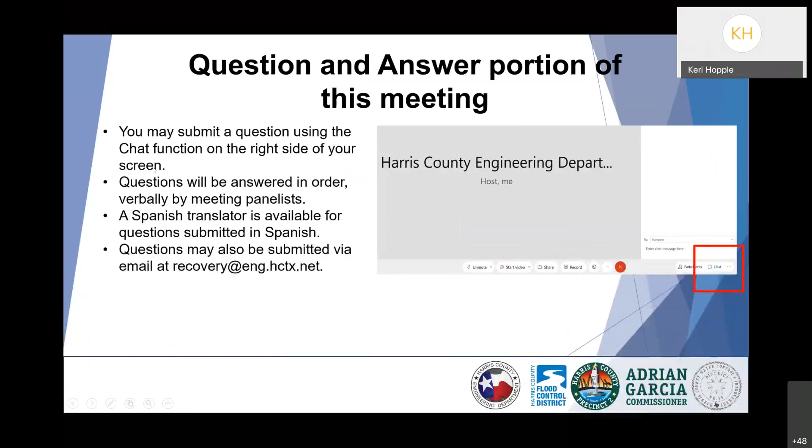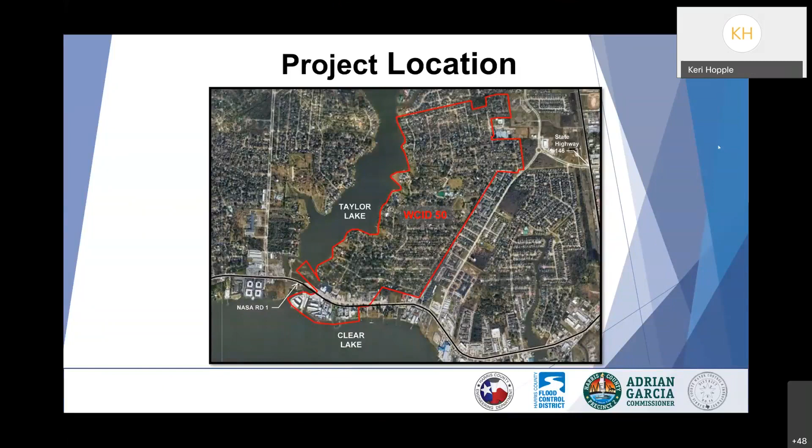The purpose of the project is to assess the historical flooding, to reduce the flood risk within the WCID 50 service area, and to reduce the number of flooded homes and alleviate the ponding in the streets.

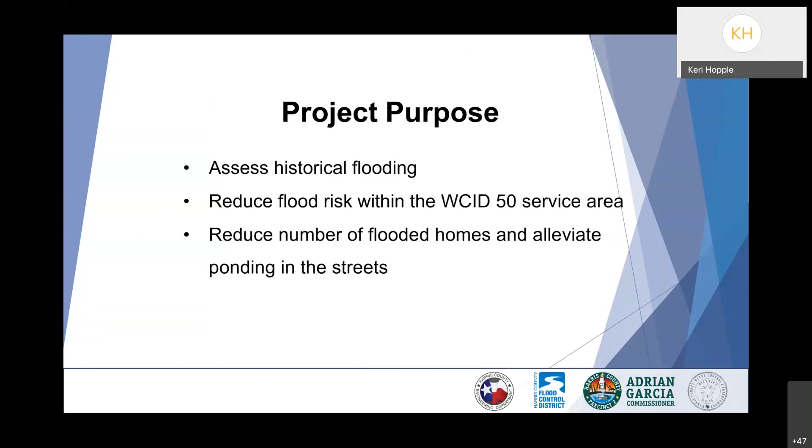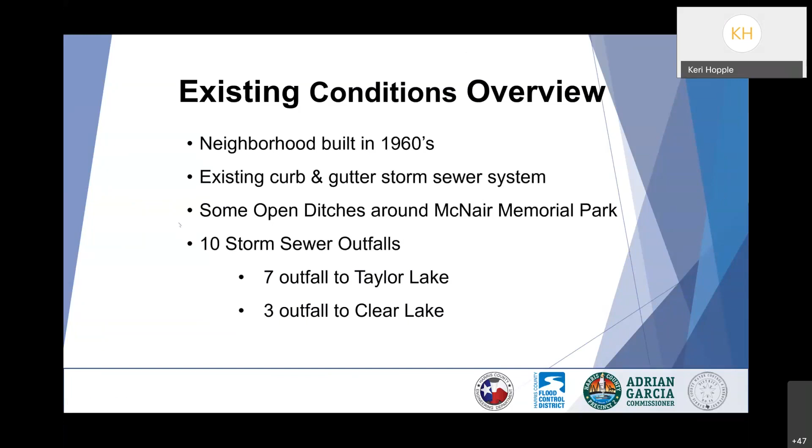During our study, we completed an existing conditions overview. As many of you know, the neighborhood was built and developed in the 1960s. It's an existing curb and gutter storm sewer system with some open ditches. There are a total of 10 storm sewer outfalls to the storm sewer system: 7 outfalling to Taylor Lake and 3 outfalling to Clear Lake.

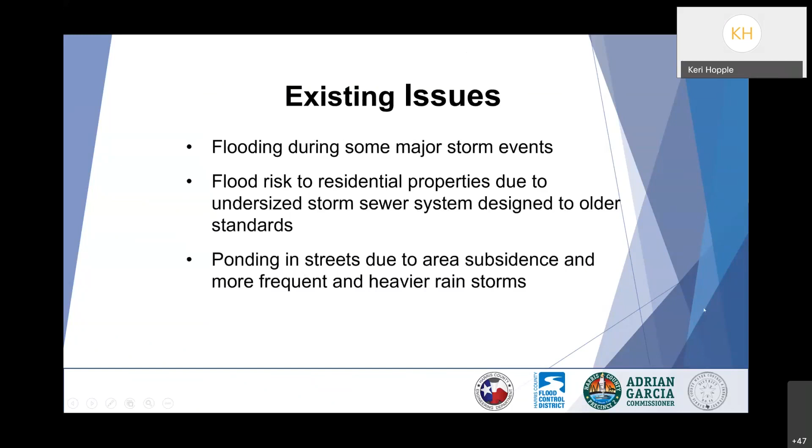The existing issues are flooding during some of the major storm events. There's flooding to the residential properties due to the undersized storm sewer system, which was designed to much older standards. And there's ponding in the streets due to the subsidence and the more frequent and heavier rainstorm events.

This is a general summary of the proposed storm sewer improvements that we are designing and will be constructing later this year. We'll be increasing the storm sewer diameter sizes along 9 streets, increasing the outfall sizes to Taylor Lake at 3 locations including Crestwood, Whitecap, and Tallowood, and reversing the flow of storm sewer at Woodland Drive from Shadow Creek to Tallowood. That will alleviate some of the burden on the southern part of the system, which is overutilized, and send it to the central part of the system, which is currently underutilized.

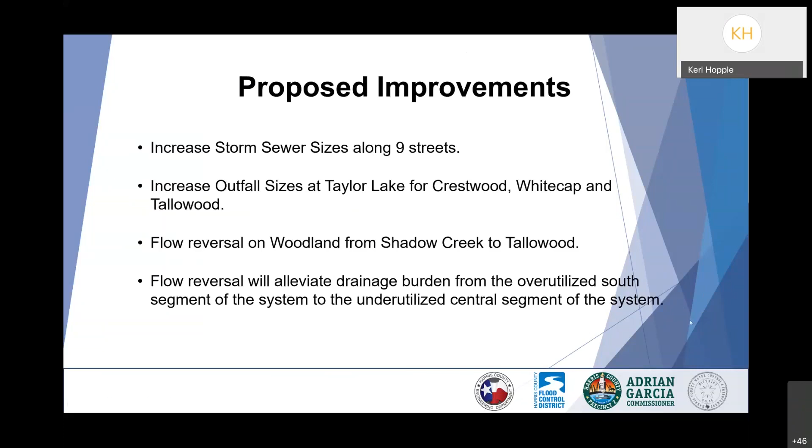Here's an overview of the proposed improvements at the northern end of the district boundaries. The main takeaway from this slide is the 3 outfall sizes that will be increased significantly to Taylor Lake at Crestwood, Whitecap, and Tallowood.

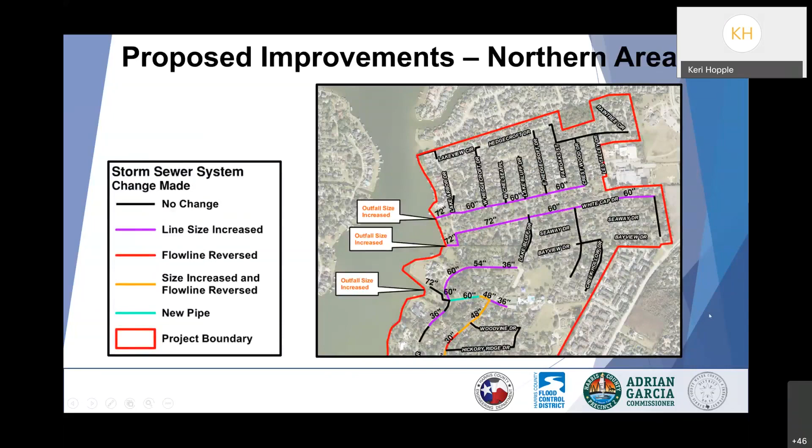Ramon, if you don't mind, I'd like to interject. I want to point out and thank Nawa Penthi and Max Gilliam, who came up with the idea depicted on this slide at the northern end, where you have the yellow and red showing the new pipe and the flow reversal. They did trial and error with the model to find out what would really help with drainage. Besides the increase in pipe sizes, this is key because everywhere from Shadow Creek south, everything depicted on this slide from north to south, was being carried to Taylor Lake to the two outfalls at the southeast corner of the district, so that portion of the system was burdened.

Doing that additional pipe connection shown in light green or turquoise, and doing the flow reversal in yellow in that area is key. We're seeing a lot of flooding in that southern area, and this carries the water not to the south, burdening that system, but to the north and then to the west into Taylor Lake. So it splits a lot of the flow and relieves the burden on the existing system, even more so now with the increased capacity of pipes. Thanks to NAWA and Max for doing that due diligence.

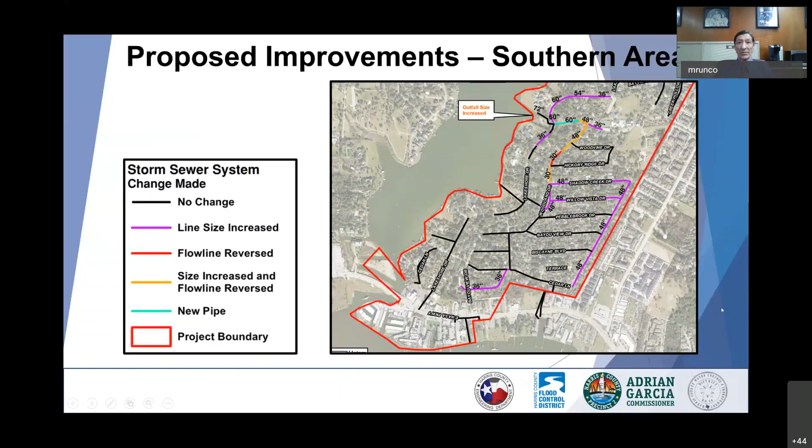Thank you, Mario. It's a good point. Now I'll turn over the presentation to our engineer of record, Keri Hopple, and she'll go over in more detail the nine street drainage improvements.

Thank you, Ramon. Good evening, everyone. As Ramon stated, my name is Keri Hopple with Midtown Engineers, and I will be the engineer of record on this project. The next few slides we're going to show you will show the proposed layout and sizes of the pipes that we are going to design for.

We will start talking here with Confederate Way. We are going to connect to the existing storm sewer system on the left side of your screen. We will then move the storm sewer behind the curb all the way along Confederate Way up to Cedar Lane, where we will turn and connect to an existing manhole.

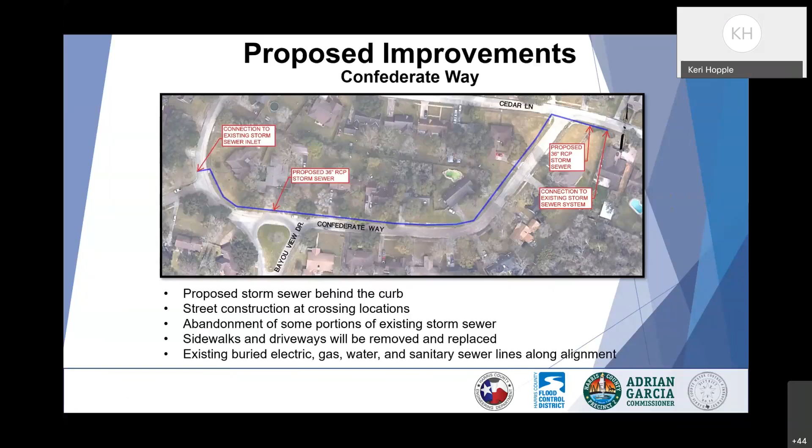Any sidewalks and driveways on this street and the additional streets I'm about to talk about that are located along the path of construction will be removed and replaced. Also, any utility conflicts that we come across will be adjusted accordingly, either before or during construction. Next slide, please.

We now are going to look at Cedar Lane. On Cedar Lane, we will begin on the top left side of your screen, where we will connect to the existing storm sewer system, and we will progress behind the curb up along Cedar Lane all the way to Shadow Creek Drive. There will be two connections: one to the Willow Vista storm sewer system that we're designing, and one to the Shadow Creek Drive system that we're designing. Next slide, please.

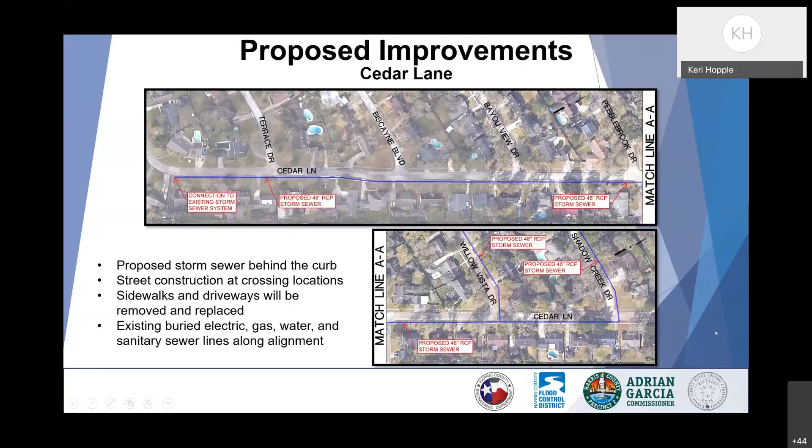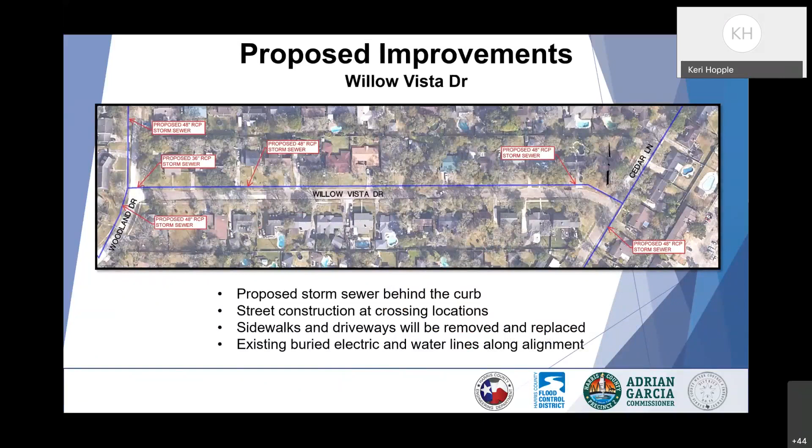On Willow Vista, we will start by connecting on the left-hand side of your screen to the Woodland Drive system. Then our storm sewer will move along the back side of the curb on the north side of Willow Vista, all the way to the right side of your screen, where we will connect to the Cedar Lane system. Next slide, please.

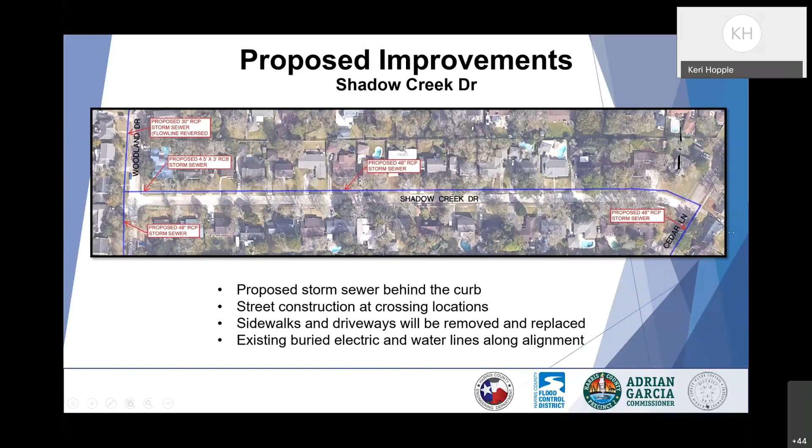Shadow Creek is very similar to Willow Vista. We connect to Woodland on the left side of the screen. We will construct behind the curb all along the north side, and then we will connect to the Cedar Lane system on the right side of your screen. Next slide, please.

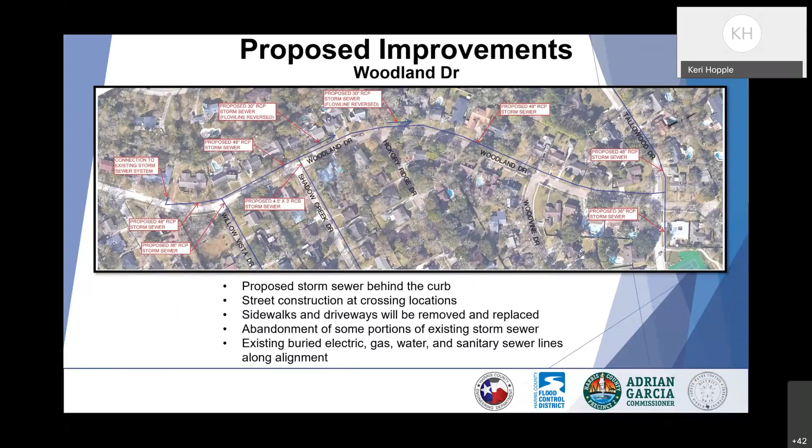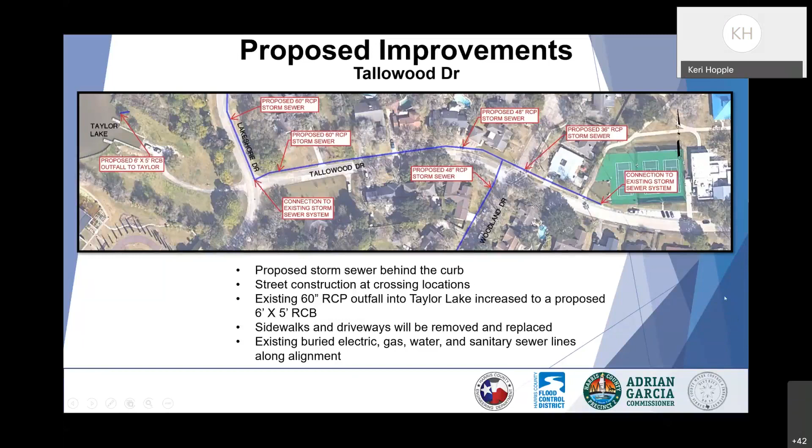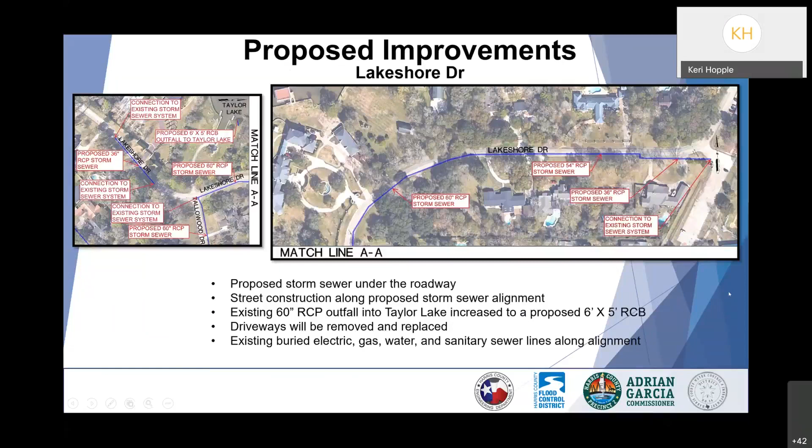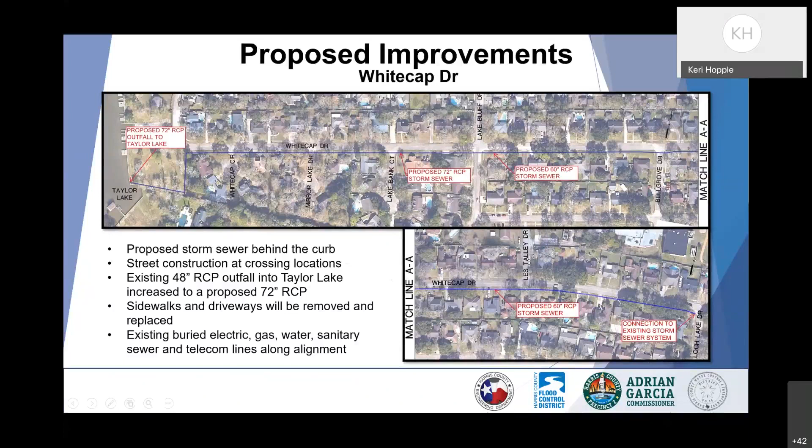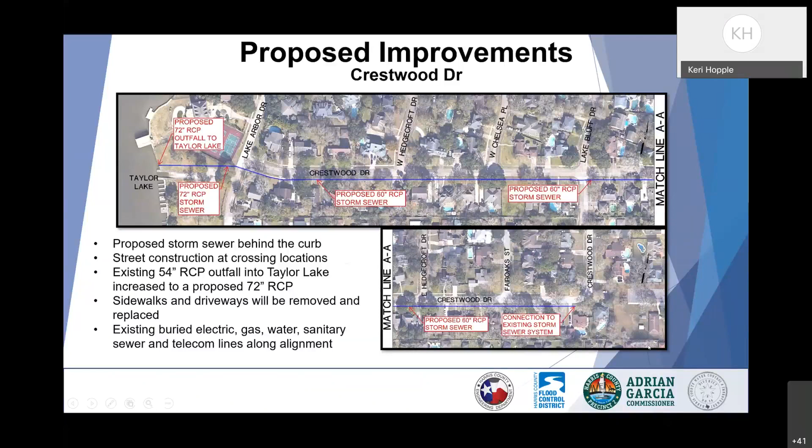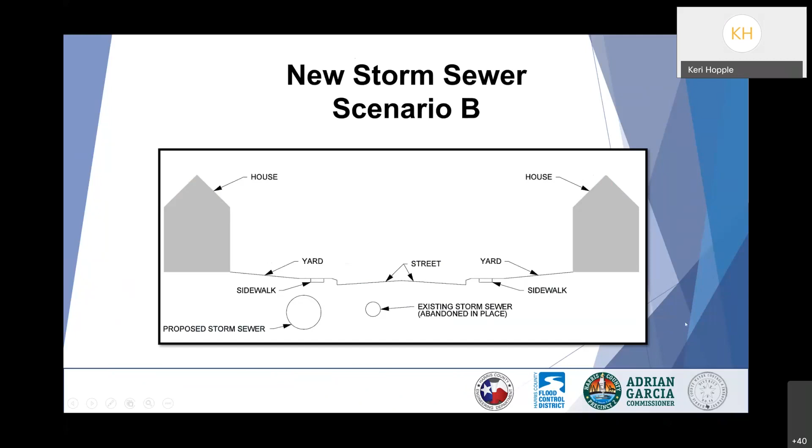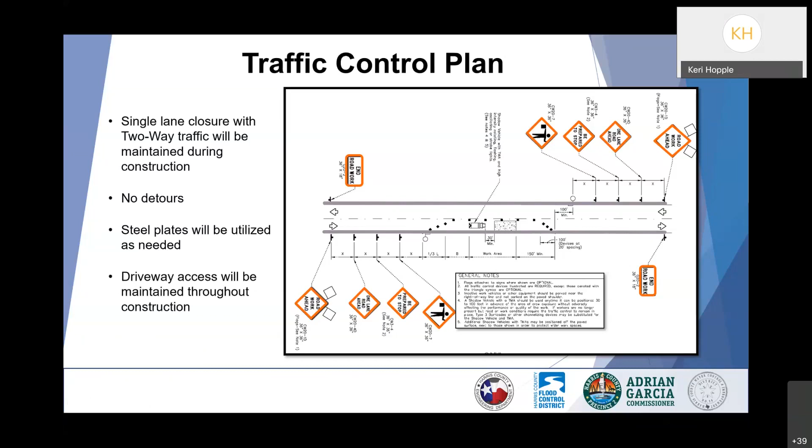We do anticipate using steel plates as necessary so that you will have access to your driveways maintained throughout the construction process.

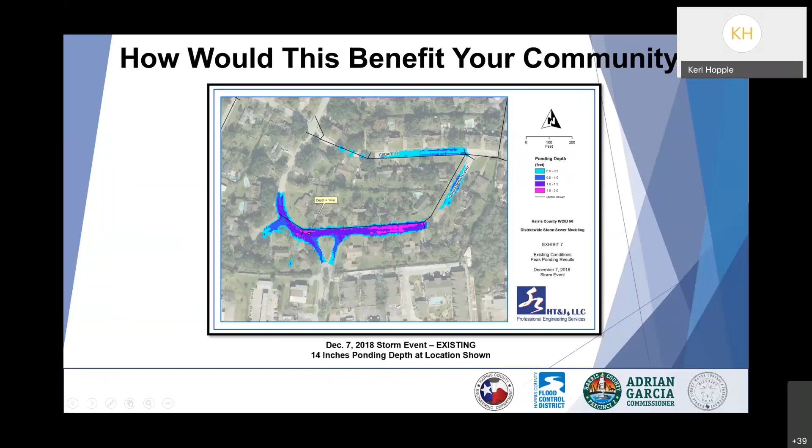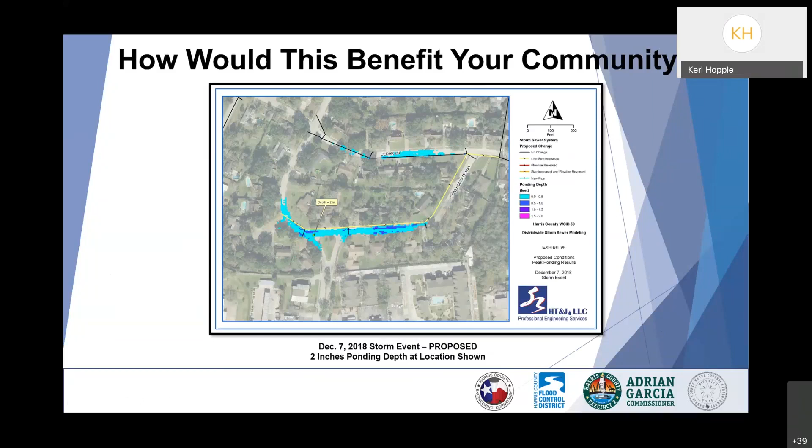With the proposed storm sewer improvements, that 14 inches will be reduced down to 2 inches. So a significant improvement for this one storm event, making it a lot safer for vehicles and pedestrians traveling, whether you're walking or driving.

This again shows a cross-section of the road there for this storm event on Confederate Way. Before, on the top, is the 14 inches of ponding going over the curb onto the sidewalks and even yards in some cases. And down at the bottom is the after scenario, which is a full foot, 12 inches, in reduction of ponding, keeping that water pretty minimally contained between the curbs.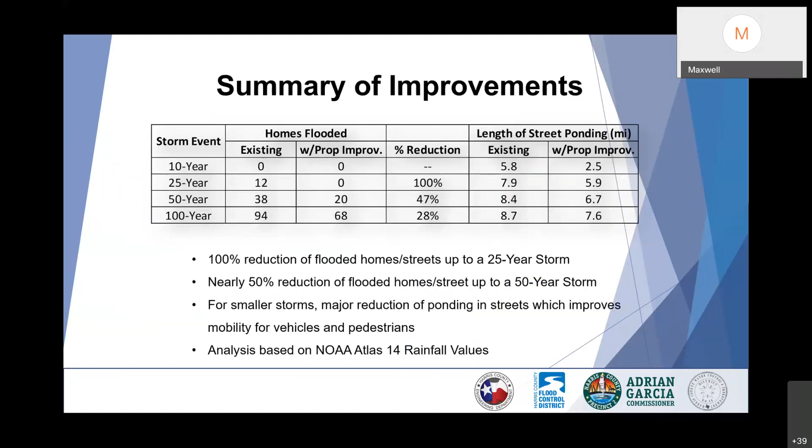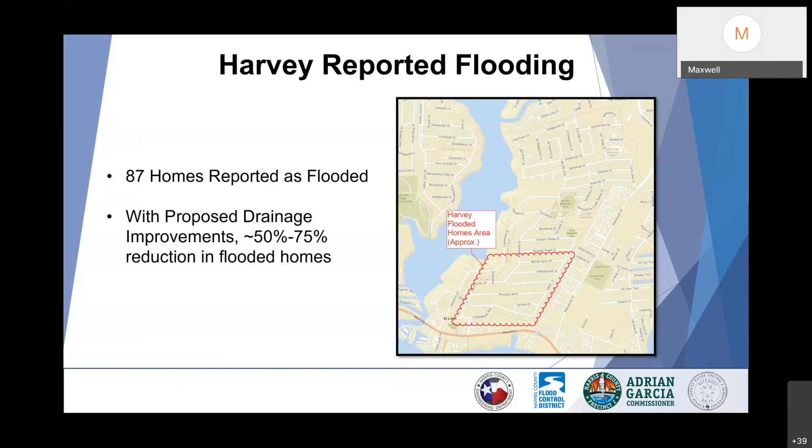So what's next? Our study phase is nearly complete. Our design phase is well underway with completion coming to an end here in May of 2021. Construction phase is expected to start in the fourth quarter of this year. Harris County will be providing notices prior to construction and during the construction phase with more information and resources.

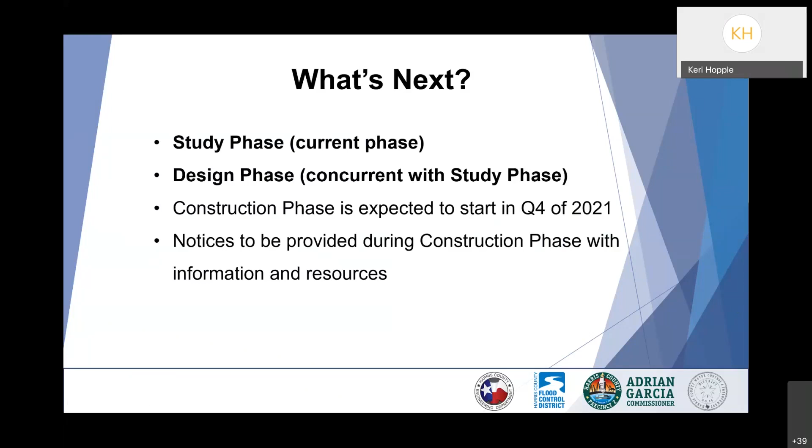We have time for one more question, and that question is, since there is a large area to be touched for our small city, how will phasing of the work be accomplished?

This is Ramon with Midtown Engineers. We have a phasing plan in our plans currently. The phasing will greatly depend on the contractor that wins the bid for this project. Typical rule of thumb is we don't like to see more than 400 to 500 feet of excavation.

We're not going to allow the contractor to excavate 1,000 or 2,000 feet and then go work on another street. It is going to be work in a work zone: remove the pipe, install the new pipe, bring everything back to original or better condition, then move on to the next section. We're definitely not going to allow for different areas to be disturbed and left in that manner until they're completed.

Jenny, let me also add on to that for the construction. Typically on projects like this, we'll start at the outfall or the downstream section and work upstream to the smaller sections. Like Ramon said, on average, 400 to 500 linear feet a day.